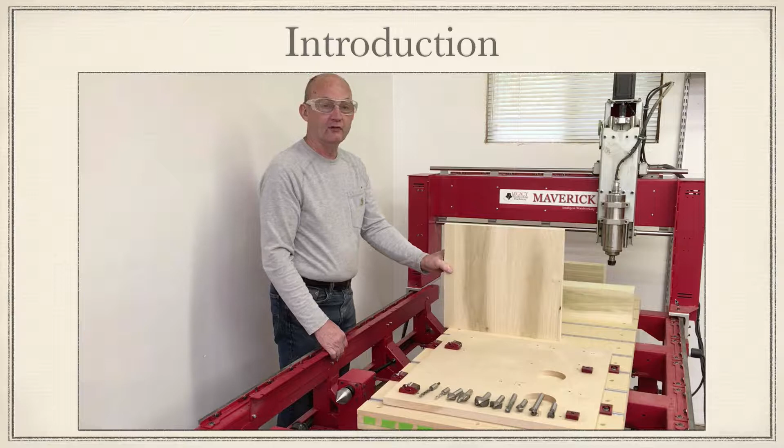Before we get started, let's talk about some of the parts and tools we'll need to build that stool. First, from the standpoint of parts, we're going to need a seat. The seat is 16 inches in the X direction, 14.5 in Y, and 1.25 inches thick. I've already milled this down, or thickness planed it, to 1.25 inches.

We're going to need 3 legs. The legs are 21 inches long, 4.5 inches in the Y direction, and 1.25 inches thick. Again, these have already been milled down to 1.25 inches thick.

We will need a shaft for the seat. This will be our threaded shaft. It is 3 1/8 by 3 1/8 by 17.5 inches long.

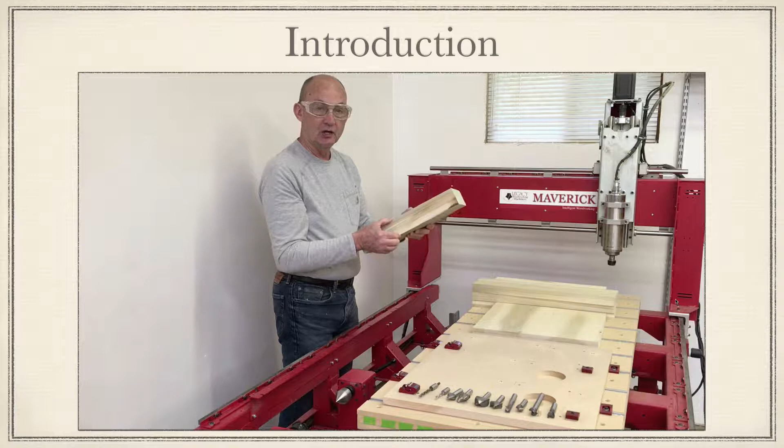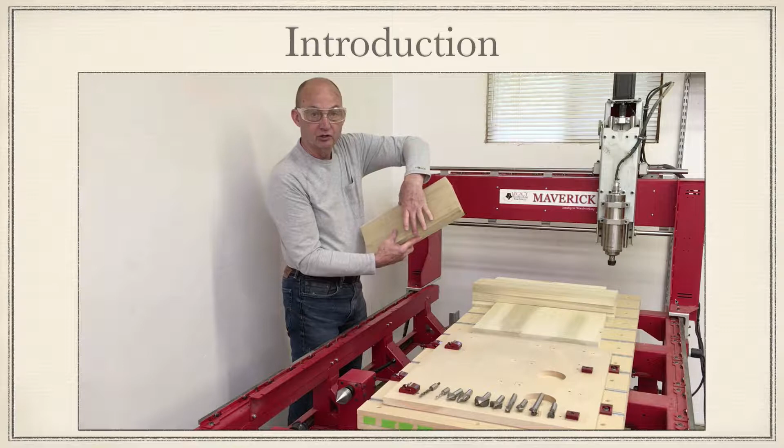And then we're going to need what we call a nut plate. This is for the dual nut plate, meaning we can get 2 of the nuts out of it. It's 14.5 inches long, 6 inches in the Y direction, and 1.75 inches thick. Now, if you've seen some of the plans, there's also a single nut plate, which is approximately half of this. It'll be 7.5 inches in this direction, 6 inches in this direction, and 1.75 inches thick.

That's the parts we'll need for the stool itself. Now, there are also some fixtures that we'll go over as we use them to help us machine the parts, so I'm not going to cover those right now. We'll get to those when we actually use them.

But there are also some drill bits and router bits that we're going to need. Let's go over those. First, you're going to need a 1/4 inch drill bit. Second, you're going to need some kind of a 1/4 inch straight cutter—you can use a dual flute, but I happen to be using a spiral down cutter. You're going to need a 90-degree, 1-inch diameter V groove cutter.

You need our old friend, the 1.25 inch surface planing bit. By the way, I might mention the Magnate numbers here. This one is a 2704. The 90-degree V groove is a 706, and you can pick up whatever kind of drill bit and spiral cutter you want.

The next one is an 1.5 inch diameter core box, that's a Magnate 810. The next one is a 1/2 inch radius with a 1/4 inch flat on the tip, a router bit for roundover—it's Magnate 1278.

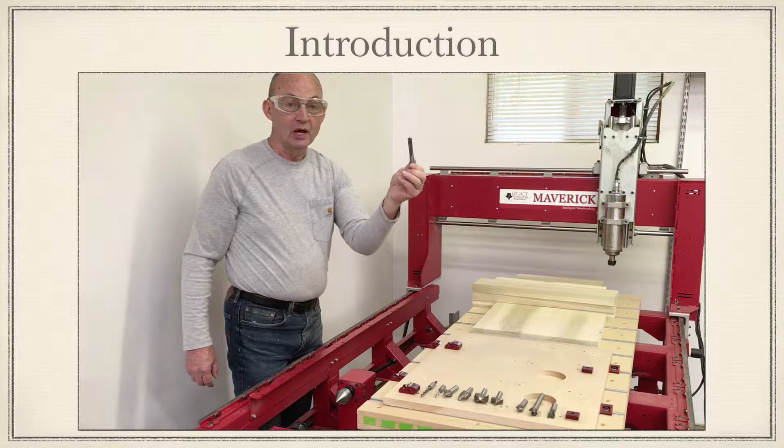Next is just a 2 flute 1/2 inch straight cutter, Magnate 285B. Number 8 is a 1/4 inch radius with a 1/4 inch flat on the bottom, a roundover bit, Magnate number 1274.

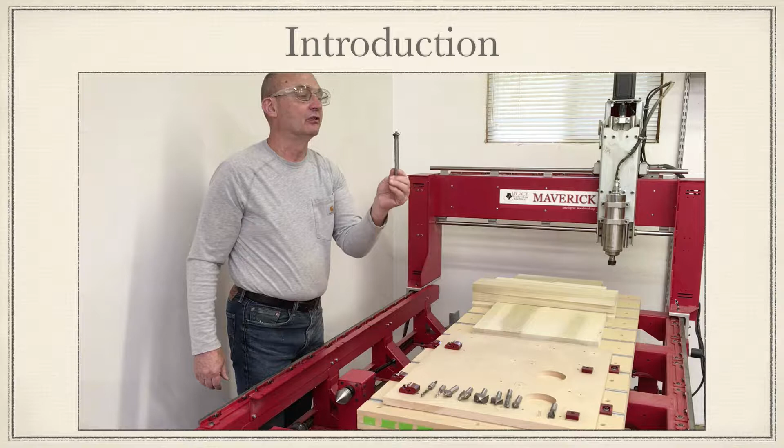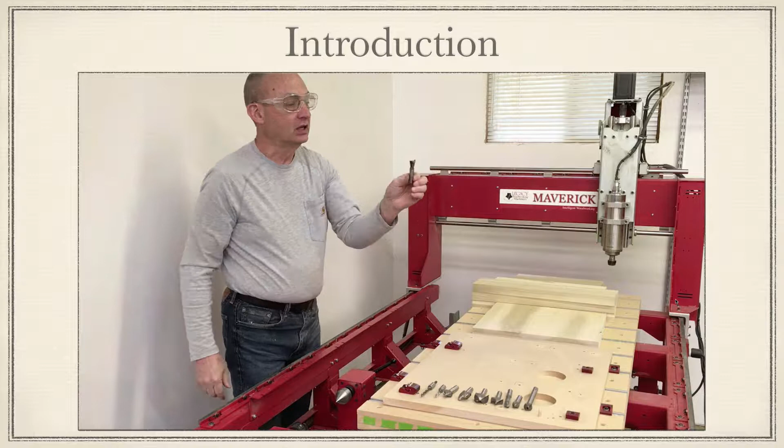This little guy is a 90-degree side cutting groove bit—we'll use this for making the threads. It's a Magnate 751. And this one is a 14-degree dovetail bit, 3/4 inch cutter, Magnate 404. That concludes the set of tools we're going to need.

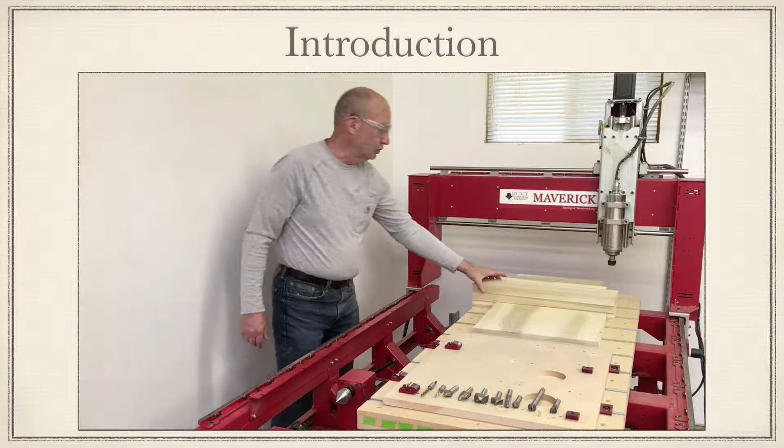We're going to start by building the seat first, and then we'll probably move to the legs. Next we'll do the 2 threaded nuts, and then finish up with the threaded shaft used to raise and lower the seat. So, okay, let's get started making some sawdust.

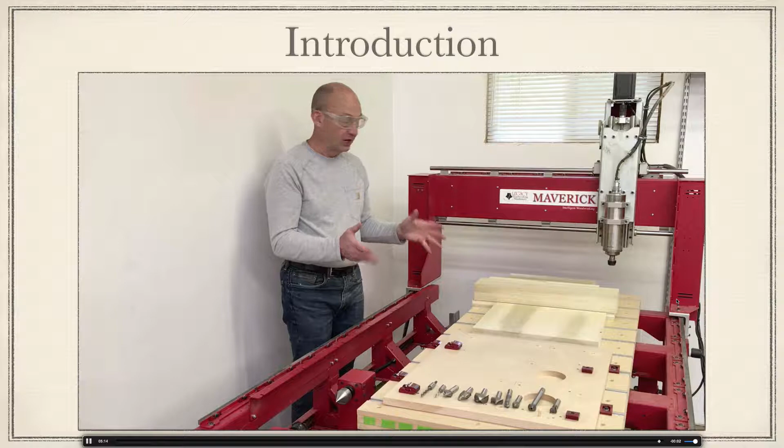Okay, let's get started building the seat. Before we get into actually machining the seat itself, I want to cover a little bit about this setup table that's available. This is kind of a cool idea.

There are several parts to this adjustable stool that are machined in the XYZ axis. This setup plate has been built with the idea that you can put all of those parts on here and you don't have to readjust your machine. There are clamps over here and a little peg right here, such that when I put this on and hit it against that peg, this guy comes down, and this point right here is my X0, Y0 point. So as soon as I get the machine set up, I can cut the seat, cut the legs, and cut the nut plate also, without having to readjust my machine, just using these pieces right here.

So this guy's machine has little notches here that show where X0, Y0 is, where the other end of the leg should show up, where the other end of the nut plate should show up, and up here is where the seat should show up, of course.

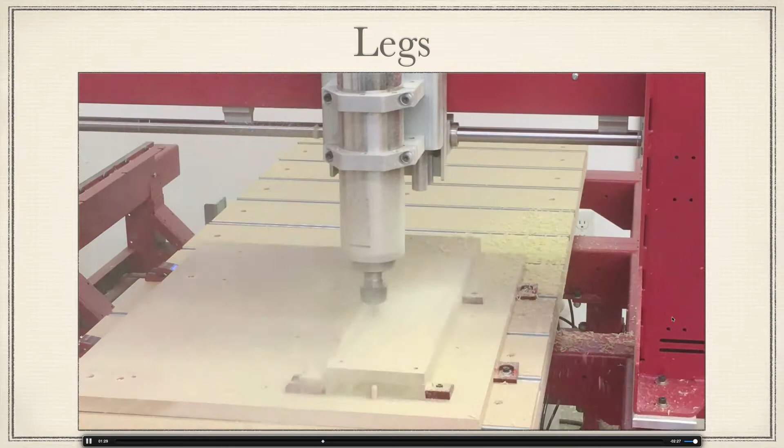Okay, a pretty quick set of operations on side one for the leg. What did it do? It drilled the 4 alignment holes and then put a round over radius on this side. We're going to now turn it over and put the same radius on the other side and then cut the part out.

We're going to pick it up, turn it over, use our holes that were drilled here, get the clamps back out of the way. Perfect fit.

Now, just kind of a word of advice here. That router bit gets real close to this clamp, so I twist it just a little bit to make sure the router bit doesn't hit it. Doesn't do the clamp or the router bit any good when they hit the clamp.

Nice and tight. We'll get some bits changed, get some code loaded, and we'll be good to go for side 2.

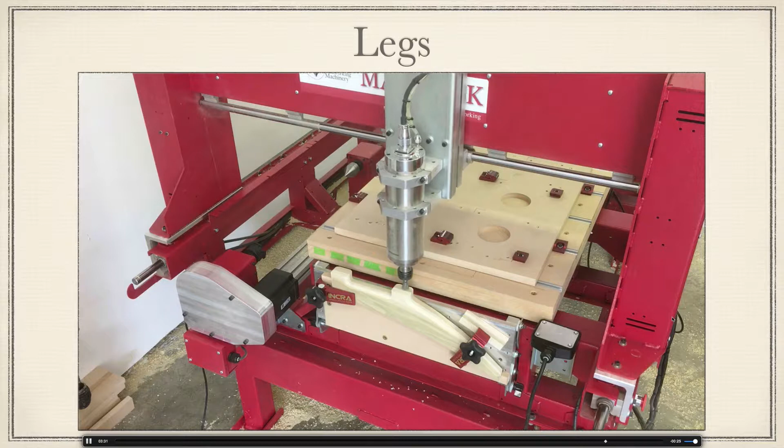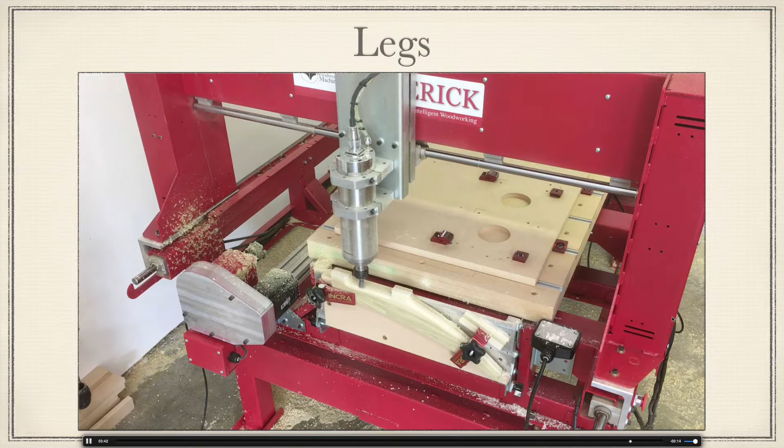To do that, we're going to move to the vertical vise. We'll clamp the leg in the vertical vise and go through 3 steps to build the dovetail. The first step is going to use the dovetail bit as a surface planing bit. Second step, we'll do a roughing pass of the dovetail, and the third step will be a final pass for the dovetail joint.

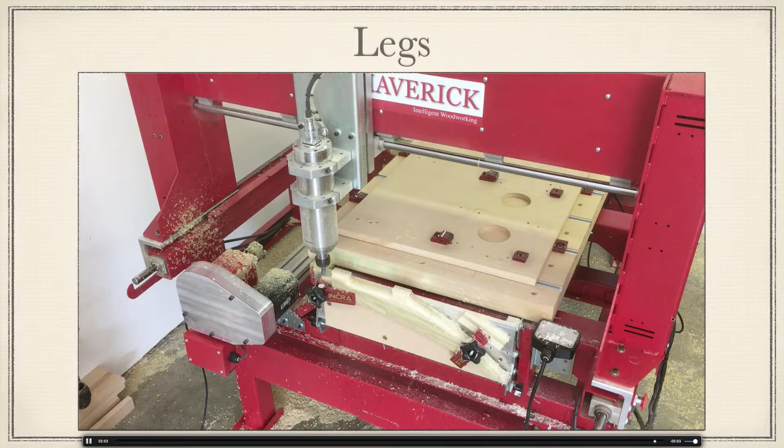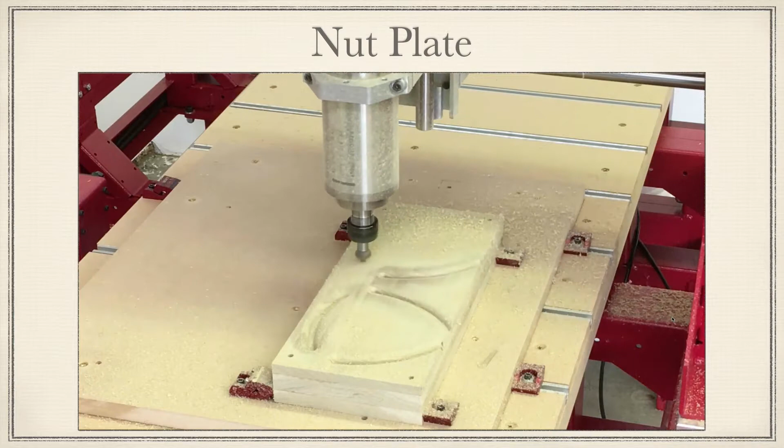Now that we've got the leg complete, we'll move on to building the nut plate. Cutting out the nut is going to follow a lot of the same steps you've already seen. First step is to drill some alignment holes. Second step is to put a round over on both of the nuts. This will complete side 1.

We'll put some pegs in the holes, turn it over, and do side 2. Side 2 is going to start by doing a round over. Then it's going to go to a 1/2-inch cutter and cut the hole in the center for the adjustable shaft, the threaded shaft, to go through.

Then it will cut the part out, leaving some tabs in there. The tabs are needed because the final step is to put some threads inside the nut, and the tabs will hold the piece in place while the threads are being cut.

That completes side 1, side 2, and threading of both of the nuts. Now, the step that remains is putting the dovetail cut in each one of the nuts. We'll illustrate putting a dovetail cut in 2 of the 3 dovetail joints on each one of the nuts.

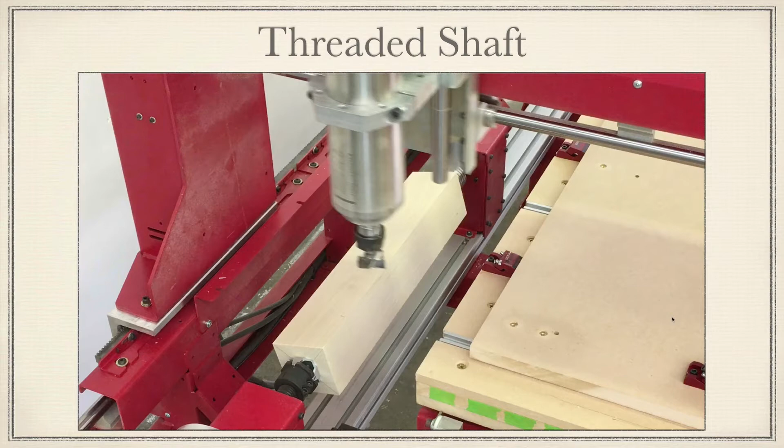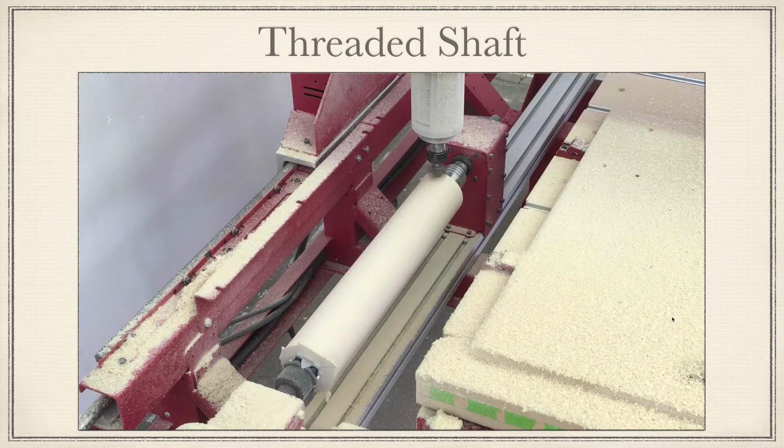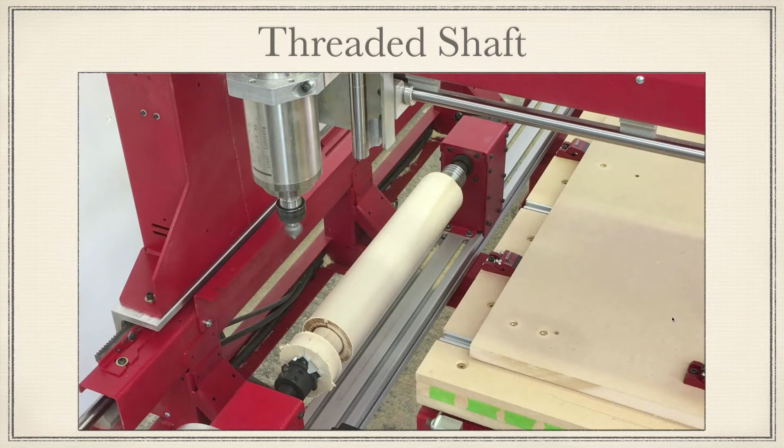Cutting the threaded shaft is a 3-step process. The first step is going to be to turn the part round. The second step is going to be to put a tenon on one end of the thread shaft. And then the third step is going to be to actually cut the threads.